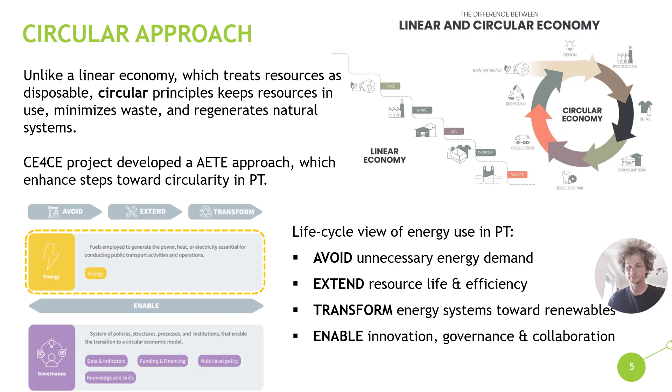Sustainable development actions have been taken over the past years or decades, but most of that attention has been focused on vehicles. As electric vehicles rapidly emerge, energy consumption is increasing accordingly, and with this increase there is also a growing need for development in other fields of energy use.

Fleet electrification plays an important role as it helps reduce emissions and reliance on fossil fuels. But in terms of energy in public transport, we also need to consider a wider picture, including energy infrastructure and energy management.

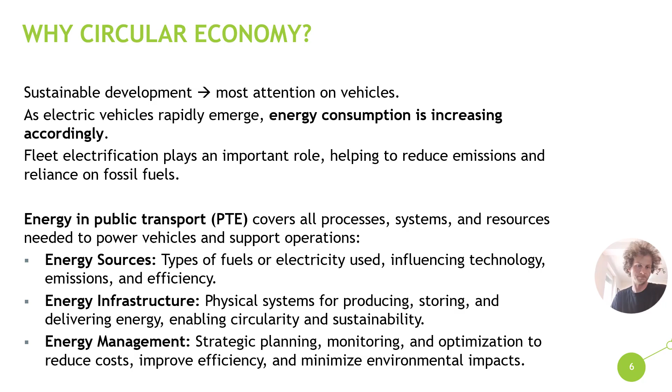Circular economy principles are about maximizing usage and minimizing costs and impact. This goes in line with the life cycle approach, or life cycle assessment—a method for evaluating the environmental impacts associated with all stages of a product, system, or service over its entire life cycle: from raw material extraction, manufacturing and assembly, distribution and operation, maintenance and use, to end-of-life management.

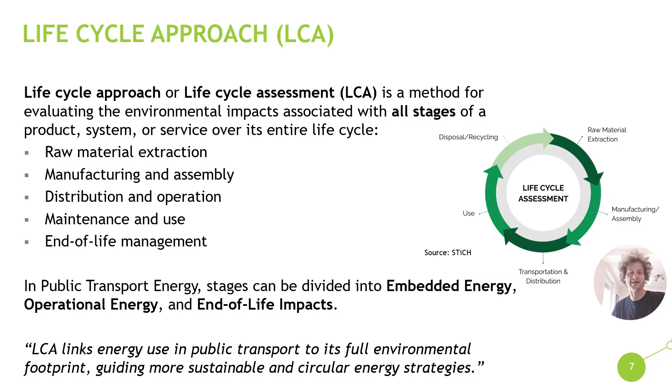In public transport, energy stages can be divided into embedded energy, operational energy, and end-of-life impacts. Traditionally, actions and focus in the public transport energy sector have been assessed mainly on the operational stage, namely tank-to-wheel.

But this approach expands the view by also considering the usage stage, namely well-to-tank, which looks at how energy is produced, processed, and supplied before it reaches the vehicles, as well as end-of-life stage impacts—long-term environmental impact, and recycling or repurposing components. In the public transport energy field, the main component is the batteries.

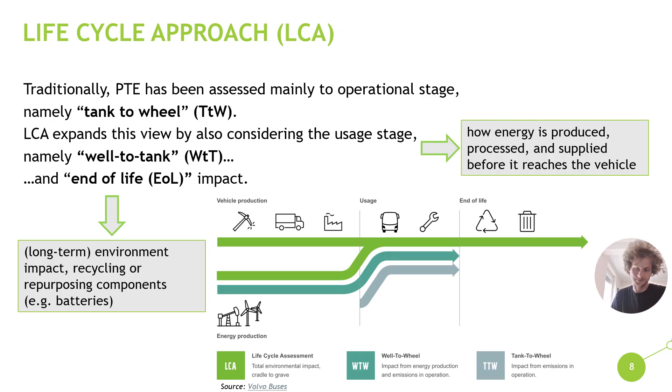So the prepared actions were divided into the AETE approach, the first stage being the avoid stage, or the upfront stage.

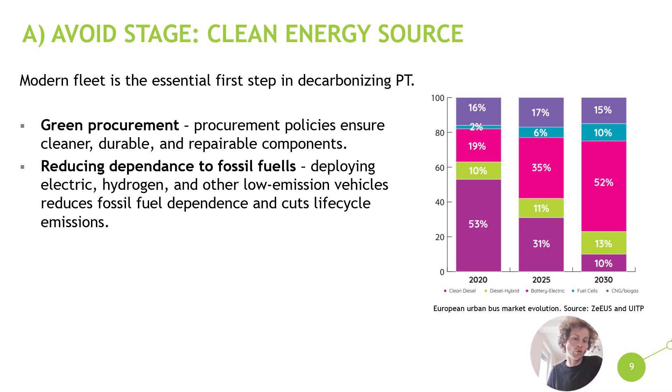This refers to clean energy sources. As said, electrification and in general a modern fleet is the essential first step in decarbonizing public transport. Here actions like green procurement and reducing dependence on fossil fuels are of big importance, as predictions show that by 2030, half of vehicles will be electric, and only 15% will be on fossil fuels, and even those will be of low or lower emission standards.

In line with reducing the use of non-clean energy, integrating renewable energy sources (RES) and recovering waste energy (WtE) also lowers the environmental impact and enhances system resilience, while also being economically beneficial. When we talk about renewable energy sources, the most common are solar, wind, and water energy, and by recuperating energy, otherwise wasted energy from braking trains comes to mind.

Different areas and sectors can then be gathered or joined in shared spots like mobility hubs, where different modalities come together and can also share energy. This is maybe a further action, but also important when thinking about using energy from outside sources.

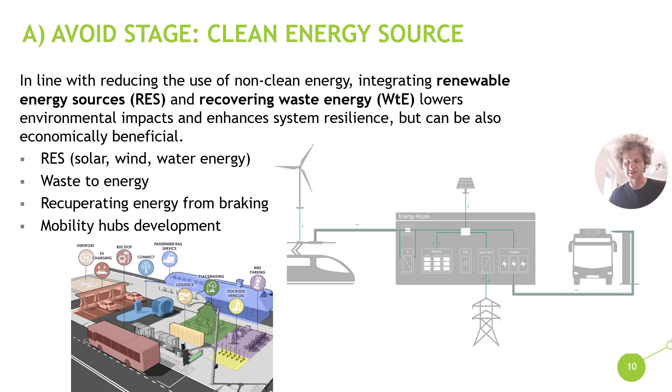So the second stage is the extend stage, or operational stage. It covers actions of charging and storage infrastructure. Infrastructure investments are also important as charging systems must keep up with fleet growth to ensure efficiency and reliability. It depends on the route type, existing charging infrastructure, and vehicle types. And the step forward is the...

...potential of energy storage, which enables the storage and later use of energy. The principle of charging and operational use is also influenced by energy efficiency and monitoring, like charging strategies, eco-driving, bus rapid transit, predictive maintenance, simulations of operational processes and scenarios.

Combining all three possibilities, energy efficient use emerges: offloading and supporting the grid/network, use of cheaper night tariff energy, and use of renewable energy sources. This is also important as the trend in previous years has shown that the cost of energy can increase rapidly, and the need for the amount of energy is also increasing.

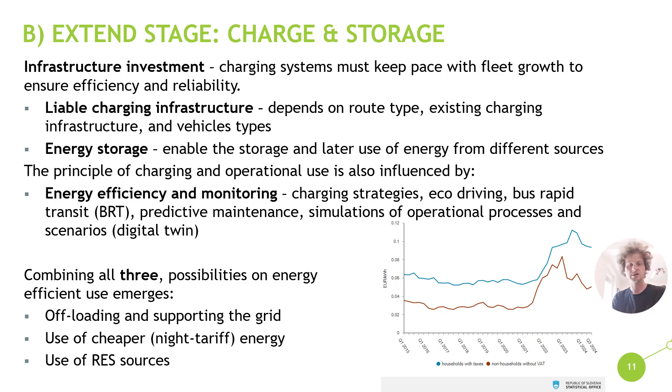Then the third stage is the transform stage, or end of life. The focus shifts to managing batteries and other components after they reach the end of their operational life. Actions like reuse and repurposing, second life application in stationary storage, depot buffers, or renewable energy systems can help to extend lifespan and delay recycling.

Then recycling recovers critical materials, and also design for circularity helps the recycling processes, along with digital product passports, which track composition, usage, and conditions, giving the recycling processes their information.

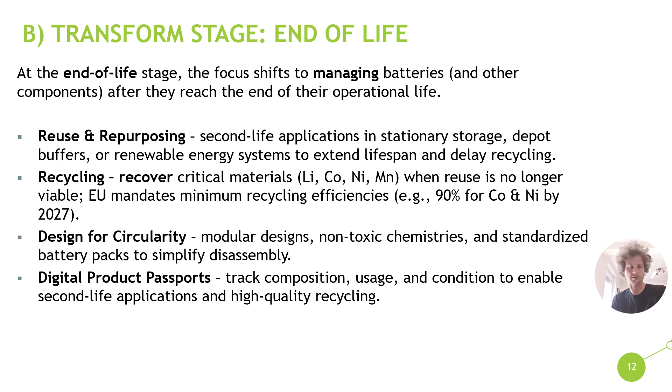And here is a visual graph or scheme representing these principles, the 7R principles for circular public transport systems, developed in project CE4CE, and those actions relevant for energy use are again shown in the slide.

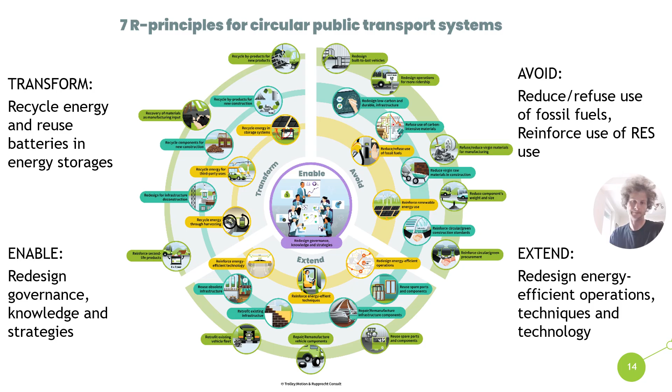To sum it up, what can the LCA approach contribute to public transport operators? By applying this assessment approach, PTOs can better approach the goal of low emission and efficient public transport. It can help to identify hotspots in energy consumption and emission across the full system, optimize energy management strategies for both operational and embodied energy, make informed decisions on vehicle technologies, energy sources, and infrastructure design, and support circular economy practices as described in this presentation.